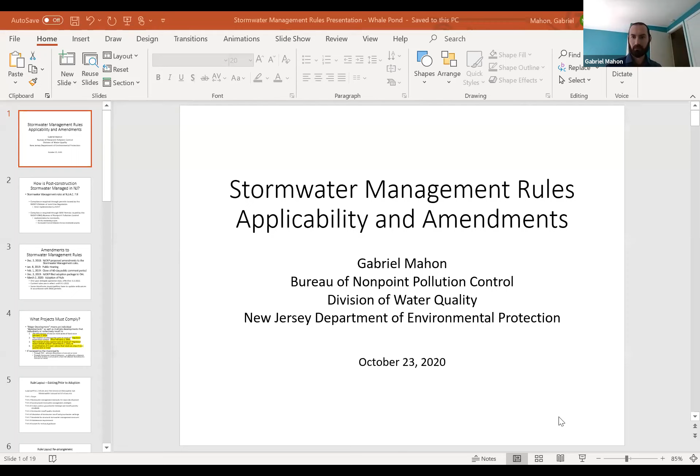So thanks for the introduction. As he said, my name is Gabriel Mahon. I'm the Bureau Chief of the Bureau of Non-Point Pollution Control in the Division of Water Quality. Today we're going to talk a bit about the stormwater management rules applicability and the amendments that we recently adopted. First thing I want to go over is just a little specifics about exactly what we're talking about.

So how is post-construction stormwater managed in New Jersey? And I say post-construction, I want to just emphasize that we're talking about post-construction — how the stormwater management is managed after construction is completed. There's a whole different set of regulations that govern how stormwater is managed during construction, and that's not what we're going to be talking about.

So post-construction management is really handled by the stormwater management rules, which are NJAC 7:8. There's two ways that an applicant's going to wind up getting reviewed under these rules. One is they come to the department because they need a permit from land use regulation. Now there is a bit of a reorganization happening at the department, so I think land use regulation's name might be changing slightly, but it's really still the same program. They do the flood hazard permits, the wetland permits, the highlands permits, CAFRA permits. And if you're also a major development, which is the trigger for being subject to the stormwater management rules, and you need one of those permits, then the department reviews to make sure you meet the stormwater management rules.

On the other hand, if you don't need a permit from the department — and the reality is the vast majority of developments in the state don't need a permit from the department — then in that case, you're getting reviewed at the local level.

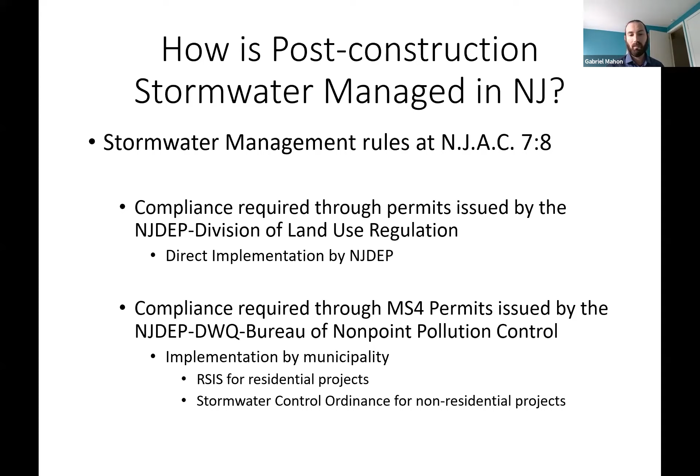Is to make requirements for residential projects uniform across the state. When it comes to non-residential projects, you really have to look at the local stormwater control ordinance. We do have a model ordinance that we put out, and many municipalities just adopt it, but others have chosen to modify it or even create their own ordinance that's as stringent as our rules. So keep that in mind—you've always got to look at the ordinance if it's a non-residential project.

Now let's talk about the amendments. This is the schedule of the amendments. We originally proposed them back on December 3rd of 2018. We had a public hearing about that on January 8th of 2019. The public comment period closed on February 1st of 2019. And then we filed for adoption on December 3rd of 2019.

If you're familiar with how the rule process works, you have one year from when you propose to adopt, to file for adoption. And you can see we did it exactly on the last day we had—we filed for adoption about an hour or two before the deadline.

Now the rules didn't actually get published in the register until March 2nd of 2020, and they come with a one year delayed operative date from that publication. So the rules won't actually become operative until March 2nd of 2021, next year. Until that time, our current rules, the same ones from before the proposal, are still in effect.

There's a few reasons why we're doing that. Obviously it's a complicated procedure to design your stormwater management for a site, so we don't just change them on a whim. We give people an opportunity to finalize things that were already mostly completed before they start having to design for the new standards. That's part of what the delayed operative date allows.

But also at the same time, we do need to give time for municipalities to update their ordinances. Our MS4 permit already sets forth a provision that basically says if we notify a municipality that their ordinance isn't up to standard, they have one year to fix it. So we just use that same time frame, one year.

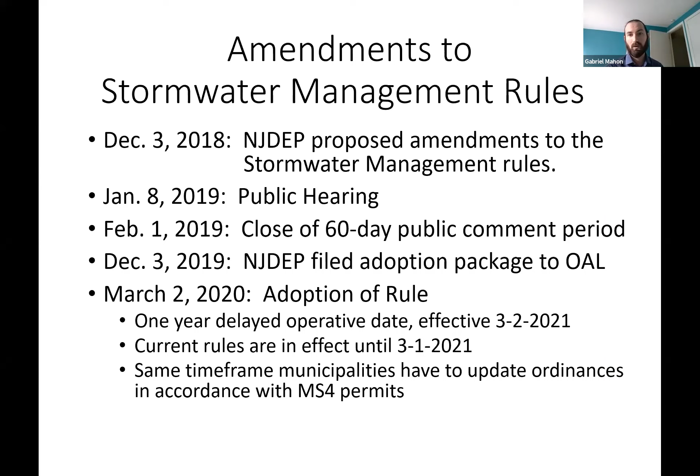And the day that we published the adoption, March 2nd of 2020, we sent notices to every municipality in the state, letting them know that their ordinance was no longer sufficient and they had one year to revise it.

Okay, importantly, what projects have to comply with these rules? Like I mentioned briefly before, the term is called major development. What we're looking at here is the definition under the newly adopted rules, which will become effective on March 2nd of 2021. But it's not tremendously different from our existing definition. I've highlighted some of the major differences and I'll go over why we did that.

First, if you read the intro language, it says it means an individual development as well as multiple developments that individually or collectively result in any of the things below. So keep that in mind—you can't break projects up into smaller projects at the same site to avoid regulation. It's going to count all the projects together.

Or you can't break phased projects up or anything like that—it counts them all together. We've always done that, but we changed that language slightly to make it more clear, because we originally used the term 'ultimately disturbing more than one acre.'

And sometimes that could have been confusing, so this clarifies that. The next thing is the disturbance of 1 or more acres of land in the definition.

Now that's the same as it is under today's rules, except we've added the February 2nd, 2004 timeframe. That's really a clarification on our part with the use of the term ultimately disturbing 1 or more acres of land. That question sometimes came up: what if I did disturbance in 1990? Does that count towards the 1 acre? So we've made it clear that it's tied to February 2nd, 2004.

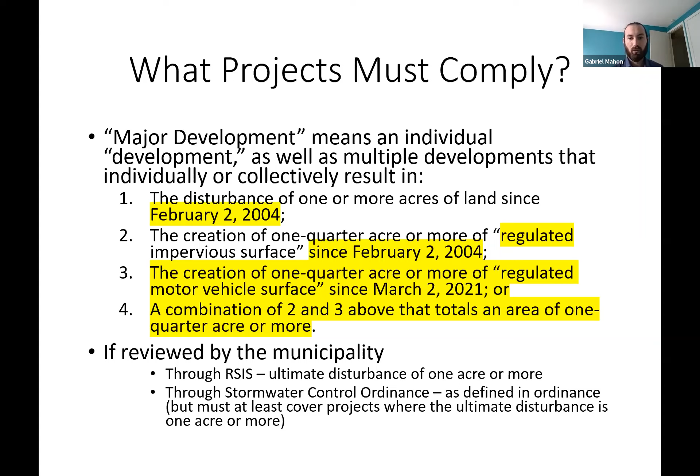That's the federal minimum standard under the MS4 program, and that's all we mandated the municipalities to do at this time. But many municipalities have chosen to either have smaller thresholds—say that 1/2 acre of disturbance, or I've seen it as low as 5,000 square feet—or they've chosen to just adopt our exact definition, which would include the 1/4 acre. So you really do need to look at the local stormwater control ordinance to know exactly what their definition is.

Just want to go over the major changes in the rules. This is the existing layout of subchapter 5, which is the main part of the rules that contains all the requirements for what you do for your stormwater management on an individual site. So we've got the scope, the stormwater management measures for major development—which really apply to all projects—and the non-structural stormwater management strategies.

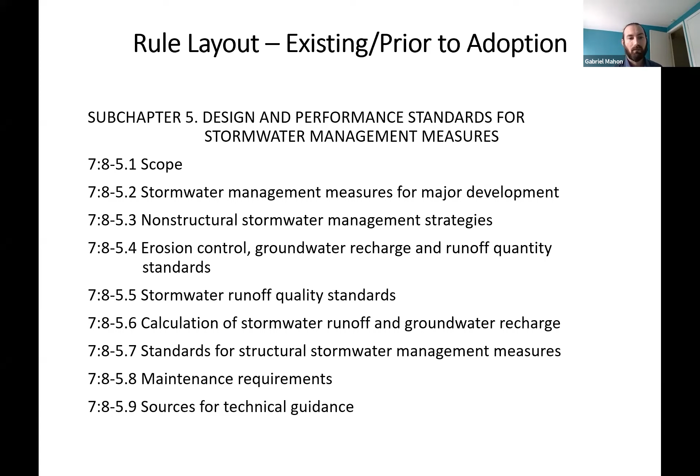You've got erosion control, groundwater recharge, and runoff quantity all packed together at 5.4. Then quality is 5.5. 5.6 is how you do your calculations. 5.7 is standards for structural stormwater management measures. 5.8 is maintenance. 5.9 is your sources for technical guidance.

These are the changes we're making. One major change is introducing green infrastructure as a requirement. We're removing the non-structural stormwater management strategies as something evaluated on a site-by-site basis, moving those into municipal planning requirements instead, requiring the municipality to incorporate that into their overall planning rather than looking at it on an individual site basis. That clears out that section, and that's where we put the green infrastructure requirements.

Other things we did: we looked at 5.7, the standards for structural stormwater management measures, and said these are really generic things that apply to all projects. We could put that into 5.2 and clear that space in 5.7 for ourselves. So we did that, moved all the requirements in 5.7 up into 5.2, and then moved the calculations from 5.6 down to 5.7. That cleared out 5.6, and we moved runoff quantity down there into 5.6.

We also moved erosion control up into 5.2, the stormwater management measures for major development, because that's also a requirement that really applied to all projects. We don't really have any erosion control standards per se in our rule — it just says meet the soil erosion and sediment control standards. So we didn't feel it was necessary to house it there with the other major requirements in our rules.

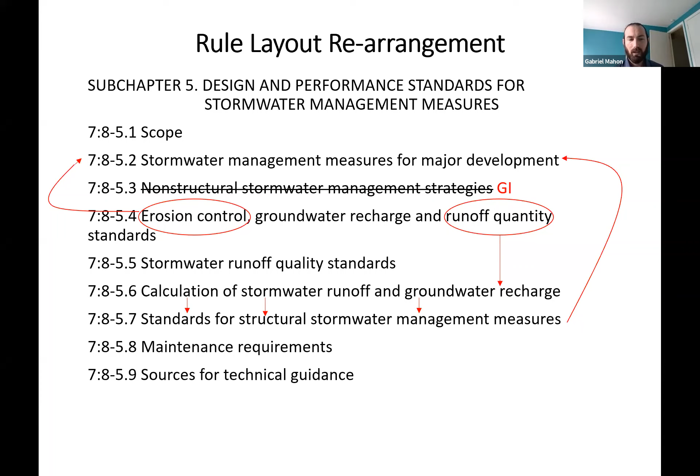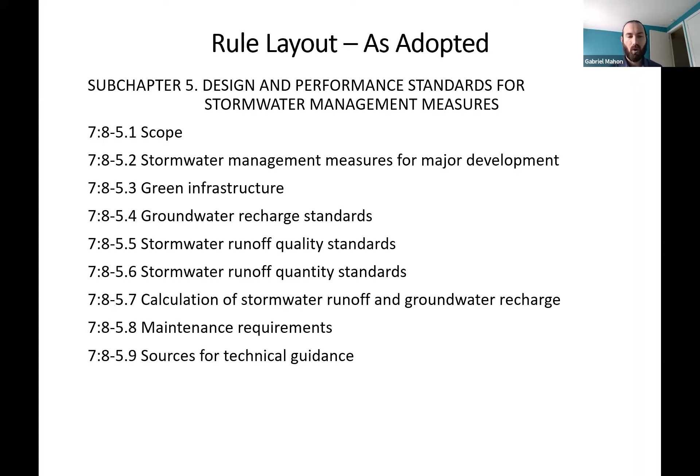So after we do all that, we have scope as 5.1, stormwater management measures for major development as 5.2 — keep in mind there's a lot more information there now than before. We've got 5.3 as green infrastructure, 5.4 groundwater recharge, 5.5 stormwater runoff quality, 5.6 quantity, 5.7 the calculations, and 5.8 and 5.9 remain unchanged. What this has done for us is made the rule a lot more streamlined and clear. The major requirements each have their own section rather than multiple things combined together, which sometimes led to confusion. Hopefully this clarity leads to better designs that are more compliant.

Let's get into the actual green infrastructure standards. First, the definition of green infrastructure under our rule — straight cut and paste from the rule: it's a stormwater management measure that manages stormwater close to its source by treating stormwater runoff through infiltration into the subsoil, treating it through filtration by vegetation or soil, or storing stormwater runoff for reuse.

Before we get the question, I'll answer it now: why doesn't this say anything about evapotranspiration? Well, we're talking about generally designing stormwater management measures to manage the 100-year storm. The amount of evapotranspiration that happens during the maybe at most 72 hours that water is supposed to be in a stormwater management basin during a 100-year storm is really not significant enough for us to include in the calculations. So it's not part of our calculations anywhere, which is why it's not specifically mentioned here. But if you think of any basins that do evapotranspiration, they all fit into either number 1 or number 2.

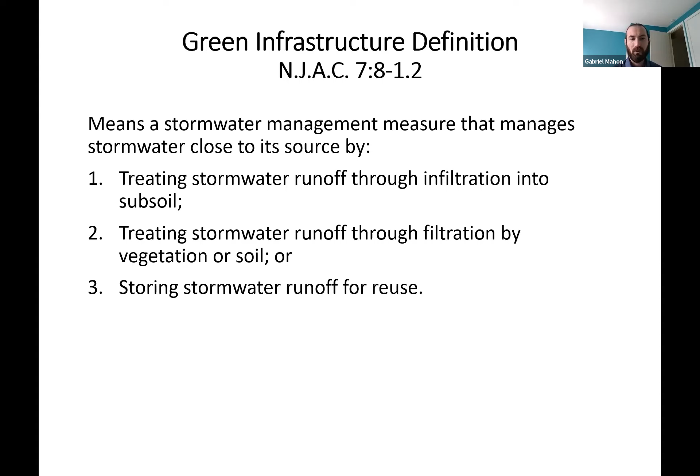Either they're going to be providing infiltration — if it's a bioretention basin that infiltrates, it'll fit number 1, and that would also likely fit number 2. I think most of the evapotranspiration-type BMPs will fall into number 2 because there's going to be vegetation and soil. So even though it's not specifically mentioned here, it's covered by our definition.

This is the slide on the green infrastructure standard itself. The standard is relatively straightforward — you just have to use green infrastructure BMPs to meet our other requirements. You have to use green infrastructure to meet recharge, quantity, and quality. The only caveat is that you need to use small scale green infrastructure to meet recharge and quality. You can use large scale green infrastructure to meet the quantity standard, but keep in mind it still needs to be green infrastructure.

We created three tables in the rules to outline all the different BMPs we have and what standards they can comply with. When we go through those, we'll talk about what makes each one small scale versus large scale.

The other thing we've maintained, which was already in the existing rules, is the ability for someone to propose an alternative BMP. These tables list what's in our stormwater BMP manual. Of course, someone could always propose a BMP that we don't have, and there's a method for us to evaluate that. Just keep in mind that what's in the BMP manual is already department approved. If you use them, you don't have to justify that they'll work—as long as you follow our design, they're accepted. If you propose an alternative BMP, it becomes your obligation to prove to the review agency that it's going to work. That puts much more of the burden on the designer.

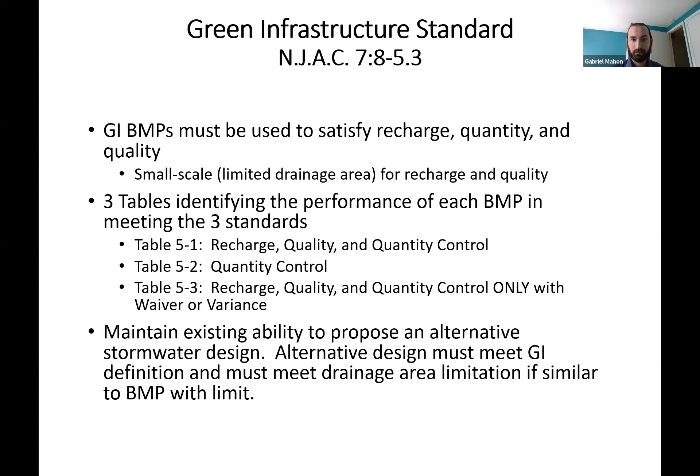This is Table 5.1, the small scale green infrastructure BMPs. You can use them for recharge, quality, or quantity. We'll go through the list. Cisterns don't have a drainage area limitation to make them small scale. Dry wells have a drainage area limitation of 1 acre. Grass swales don't specifically have a drainage area limitation, but based on their design criteria, they have a relatively limiting area already—you need to maintain a flow of maximum 2 inches, and there's a certain maximum velocity allowed.

So really, you can't have a grass swale capturing a huge area and still meet the requirements. A green roof doesn't have a drainage area limit because generally you're not putting drainage onto it. Manufactured treatment devices have a drainage area limit of 2.5 acres. You might be wondering why manufactured treatment devices appear on a slide about green infrastructure—there are many kinds, and we have a few that are basically small scale bioretention systems, which meet the definition of green infrastructure. That's the type we're talking about here. Next is pervious paving systems.

Pervious paving systems have a drainage area limit, but this one's a little different—you can have 3 times your pervious paving system's area flow onto it, so it's a 3-to-1 ratio. Let's say you construct 1 acre of pervious paving; you could have 3 acres of regular impervious pavement flow onto that, and it still meets the drainage area limit.

Then we've got small scale bioretention systems, small scale infiltration basins, and small scale sand filters—all three have a 2.5 acre drainage area limitation. And we've got vegetative filter strips. Those don't specifically have a drainage area limitation, but like grass swales, their design criteria is already very limiting. You have to have sheet flow flowing in, and sheet flow can only extend for 100 feet. So the maximum length flowing into this vegetative filter strip is already only 100 feet—you really can't have a huge area draining there.

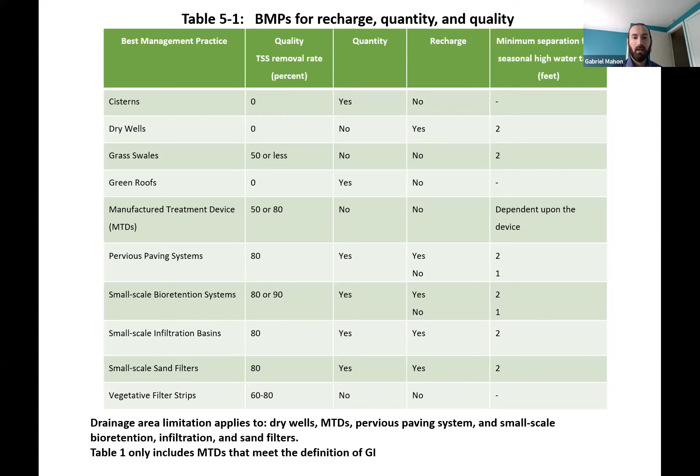Now this is Table 5.2. Keep in mind this is still green infrastructure, but no longer the small scale type, so you can only use these for quantity control. That's bioretention systems, infiltration basins, and sand filters—the same as the last chart, except in this case they just don't meet that 2.5 acre drainage area limit, so they're no longer small scale. You can't use them for quality or recharge at that point, but you can still use them for quantity.

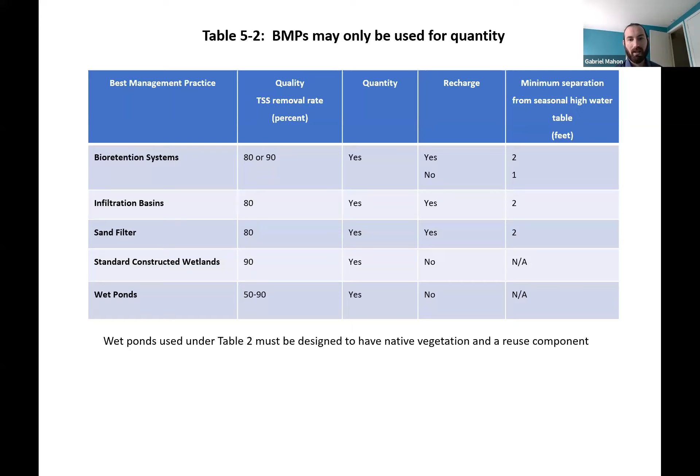This chart also adds standard constructed wetlands and wet ponds. Those don't appear in the earlier chart because they have such significant hydrology requirements that they need large drainage areas to maintain their permanent pools. For a standard constructed wetland, there are several varieties, but the one with the lowest drainage area limit is still 10 acres, and for a wet pond our limit is 20 acres—so they really don't fit our model of small scale. One other thing to keep in mind is that a wet pond, to be green infrastructure, has to have something to help meet that definition we showed earlier—it's got to have vegetation, reuse, something to make it green infrastructure.

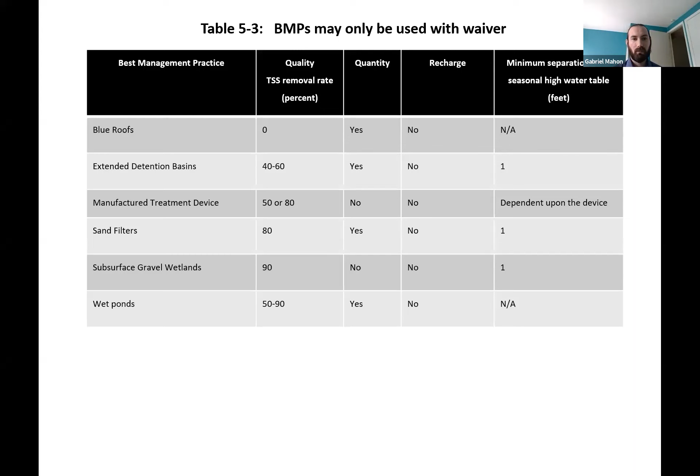Okay, that pretty much summarizes the green infrastructure standard. I'm going to go into the next big change we made, which is a change to the water quality section. What we've done here is revised the applicability of the water quality section.

Instead of being triggered whenever you create a quarter acre of impervious surface, we've changed it to creating a quarter acre of motor vehicle surface. We've done that for a couple of reasons. One, that lines up with our implementation - we never made people treat water quality for rooftop areas or sidewalks, areas that weren't vehicularly traveled. So lining our rules up with our implementation is important, in my opinion, for transparency.

But the other reason is we do want to make people treat other vehicular surfaces that aren't necessarily impervious. We would see people propose a gravel parking lot or a dirt roadway, and say 'well, it's not impervious, I don't have to do water quality.' We wanted to put a stop to that, particularly since studies show total suspended solids coming off dirt and gravel roadways is actually much higher than paved roadways. So we definitely want to get treatment for those types of roadways.

It's also important to note this is included in the definition of major development - we went over that before, as number 3 added to the definition - because we've changed the applicability here to motor vehicle surface. We didn't want a situation where someone creates a quarter acre of motor vehicle surface that would trigger water quality rules, but if we didn't change major development, it wouldn't have been subject to the rules in the first place. So we needed to change both, to make sure creating a quarter acre of motor vehicle surface is both major development and triggers the water quality standards.

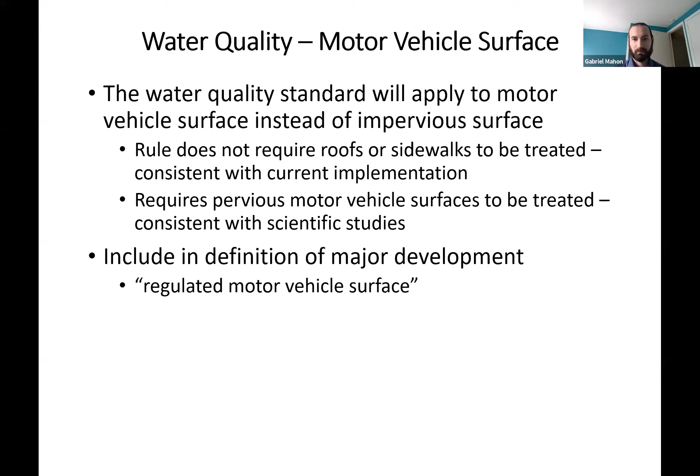Next thing I want to cover is some definitions we created to clarify the applicability of the rules. I briefly touched on the fact that we created definitions of regulated motor vehicle surface and regulated impervious surface. What these do is incorporate some concepts from our frequently asked questions, but I think they're very logical if you think about it.

Regulated motor vehicle surface focuses on things that are water quality specific. So these are situations where you have an existing roadway, and say the water flows off the roadway into the forest surrounding it and never makes it down to the stream, and someone proposes to put curbs and a collection system in this roadway. Now they're going to discharge that right into the stream - it's new impervious surface to the stream because those pollutants were never getting there before, or at least not to the same degree. That's something we felt needed to be regulated, and we long did regulate that through our frequently asked questions, but now it's very clear and added to the rule using that definition of regulated motor vehicle surface.

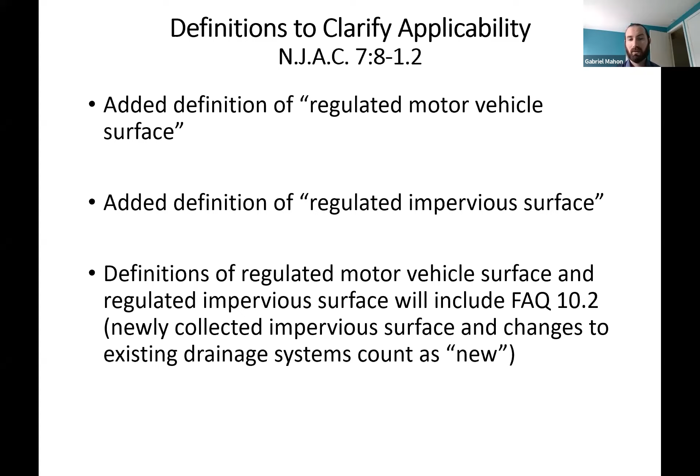Regulated impervious surface has similar concepts, except they're focused on flooding rather than water quality. This would be things like expanding the capacity of an existing collection system - you didn't create new impervious surface, but if the collection system was undersized and now you're making it 3 times larger, flow could get down to the stream faster because of that, and that could have adverse flooding impacts that need to be analyzed before it should be approved.

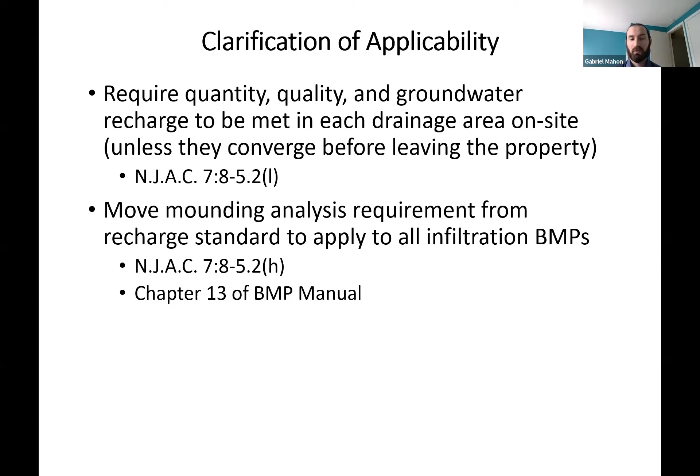A couple other things we did to clarify applicability: we added a requirement that all the standards need to be met in each drainage area on site, unless those drainage areas converge on site. We had this previously, but it was only contained in the water quality section. We've expanded it so it applies to water quality, quantity, and recharge. We've also moved our groundwater mounding analysis requirement from the recharge section into the section that applies to everything. Most of those BMPs are doing recharge, but sometimes those infiltration BMPs are for water quality and not recharge, so we wanted to make it clear it's for everything, not just if they're for recharge.

The last thing I want to touch on is the changes we made to the variance section of our rules. I don't know if any of you are familiar with what it says now, but there's not a lot of information. It does allow a municipality to grant a variance if someone is willing to do mitigation in the same drainage area. But there were no restrictions on when you could grant it. A municipality could grant it if they felt like it, as long as they had a mitigation plan in their municipal stormwater management plan. That requirement still exists, but we've clarified now that you can only grant a variance if it's technically impracticable on site.

And it has to be for engineering, environmental, or safety reasons. The applicant still needs to come as close to meeting the requirements on site as they can. So they can't just say, well, let me get a variance, I'll do it off site. They have to come as close to meeting on site as they can.

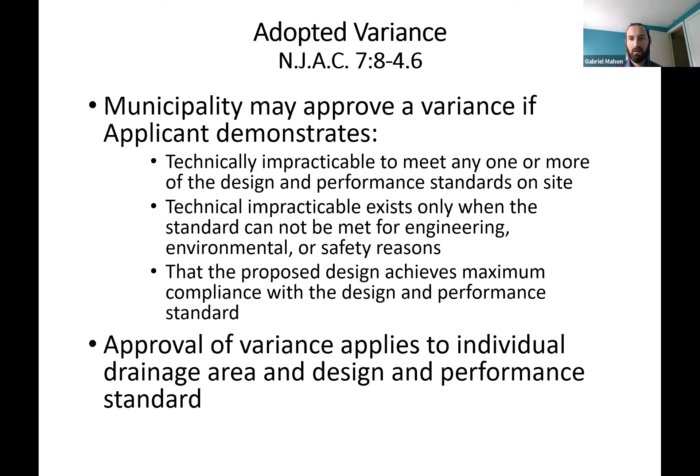We've also clarified that it only applies to the individual drainage area and performance standards. So they couldn't come in and say, well, I can't meet water quality here, but let me just do all my water quality as mitigation. No, they still need to do what they can on site, and then after that, they can make up what they couldn't meet on site as mitigation.

We've also clarified that it can either be a project that's in the municipal mitigation plan, or the municipal mitigation plan can set up criteria for the municipality to evaluate a project selected or proposed by the applicant. It has to be approved no later than preliminary or final site plan approval, right? Obviously, you can't just defer your mitigation to some nebulous time in the future. It has to be located in the same HUC 14 — previously it just said drainage area, which is kind of a vague term, so we clarified that by saying HUC 14.

It also has to be constructed prior to or concurrent with the major development, right? Because if you could potentially have adverse impacts by not doing your stormwater management, the same idea is true: if you don't construct your mitigation first, and you construct the major development first, there could be adverse impacts to the property owners surrounding that if you don't do your mitigation. It has to comply with the green infrastructure standards.

We've also clarified that the applicant or the party responsible for maintenance of the major development has to be responsible for the mitigation as well. So you can't pass the maintenance of the mitigation off to some third party. It has to be the same group that's involved with the application, either the applicant themselves, or, let's say, it's a residential development where you're establishing a homeowners association that's going to do the maintenance of the BMPs on site, then they can be responsible for the maintenance of the mitigation as well.

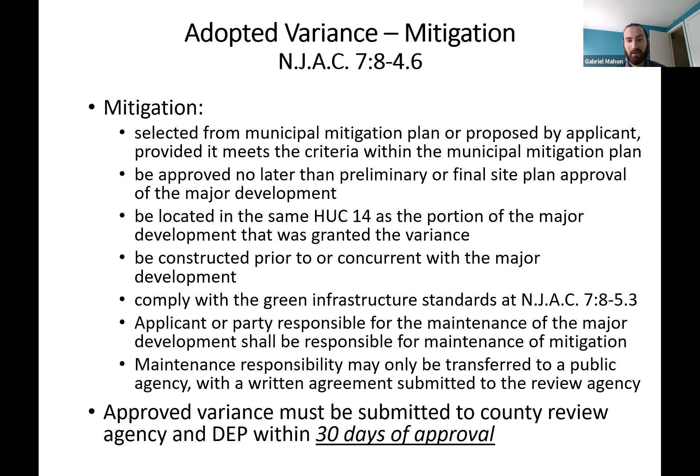Maintenance responsibility can only be transferred to a public agency if there's a written agreement that the agency has agreed to it, and submitted to the review agency. On top of that, we've also clarified that it has to be submitted to the DEP and to the county within 30 days of granting a variance. Previously it did say you have to submit it to the county and the DEP, but there was no time frame, so we've clarified it has to be within 30 days of approving it.

This is going to require someone to do mitigation. So let's say they don't meet green infrastructure on site, they're going to be doing it as a mitigation project. They have to provide equivalent or greater treatment than they would on the major development.

I think it's logical, though when you try to write it out it can be confusing. Basically if they had an acre development and were supposed to do green infrastructure for that and didn't, they're going to have to go off site with an equivalent or greater area. So it'll have to be at least an acre or more, and also has to have at least as much impervious surface. So if that acre development was 3/4 of an acre of impervious surface, their mitigation will have to manage at least an acre of total land, and at least 3/4 of an acre of that will have to be impervious surface.

On top of that, you can't just use a vegetative filter strip or a grass swale alone as your mitigation. The reason is they would have never been enough on their own to meet the requirements on the site originally, so they can't be enough for your mitigation. Now they could be combined with something else to do your mitigation, that's fine, but they just can't be the sole measure.

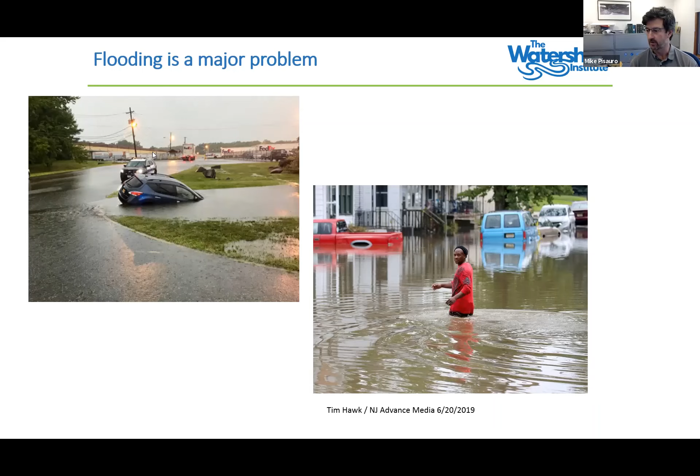The Watershed Institute is located in central New Jersey. We have been around for 70 plus years, and we've been working to keep our water healthy, clean, and safe. As Gabe has talked about the green infrastructure rule, this has been a huge move forward on the way we address stormwater management, but it has not been enough, and DEP has been working on additional stakeholdering and additional rules coming forward. But part of that, as we all know and have experienced, flooding is a problem. Flooding is continuing, and it's probably in some of our areas getting worse for multiple factors.

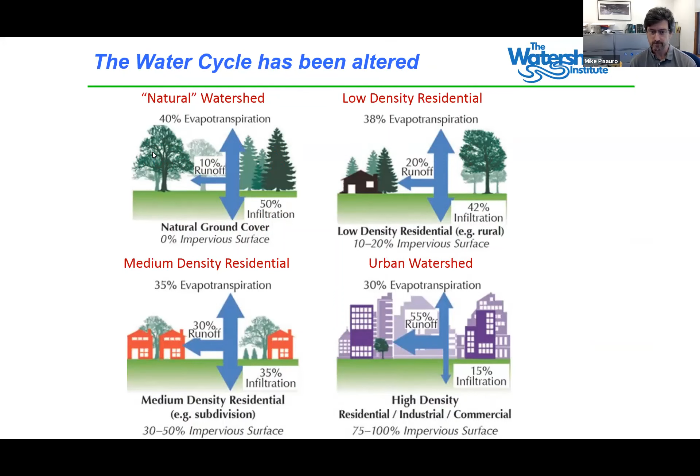Part of that is because of impervious surface, and we've sort of changed the water cycle. So as our communities get more and more dense with impervious cover, there's less space for that water to go and to infiltrate. Also, our weather patterns have changed.

So the first 7 decades of the 20th century, New Jersey has had about 44 inches of rain. In the 21st century, as of this slide from 2016, we had just over 47.5 inches of rain, which means almost 3.5 inches more rain hitting New Jersey, and quite a bit more water that New Jersey's stormwater management systems have to address, at the same time as we are increasing our impervious cover.

Recent land cover reports show that New Jersey has continued to convert our open spaces and farmland into urban space. That has slowed down, but overall in New Jersey we're about 33% impervious cover, and depending where you are in the state, your community might be much higher. So that water has to go somewhere.

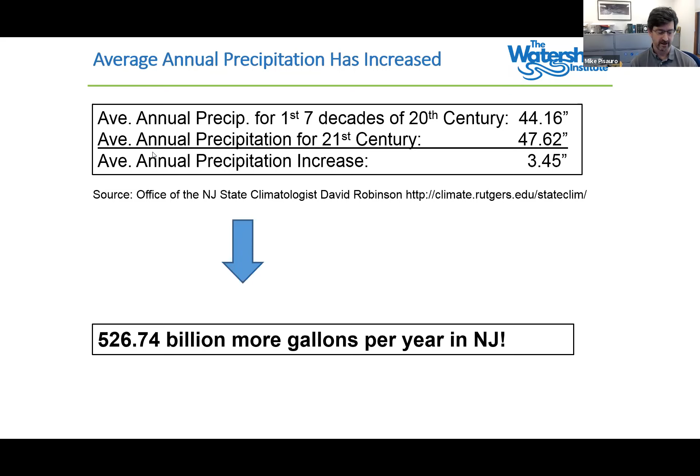Also, the rain patterns have changed. We're having more frequent heavy storms, and that rain is coming down in a shorter period of time. That has led to a bunch of things, and is one of the reasons why we, with other groups, have developed an enhanced model ordinance.

So we have more impervious cover, we have flooding, we also have water quality issues. This is from a DEP report: basically, the waters we monitor are not meeting designated uses, those uses set out by the Clean Water Act in New Jersey. They aren't meeting them, and for a large part it's because of the way we manage our land.

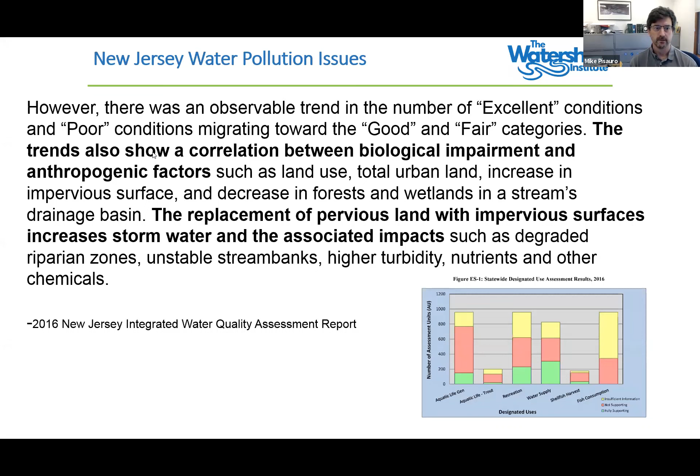Our current stormwater management regulations, while they have been improved through the Green Infrastructure Rule, are really addressed at slowing the rate of pollution, slowing the rate at which stormwater runs off our site. It's not stopping the pollution.

I hear this a lot at planning boards and zoning boards. When we talk about stormwater management, there's confusion when DEP talks about water quantity reductions. Those are, by and large—I think 99.9% of all projects I've ever seen—really talking about a reduction in the rate. You're actually having an increased volume of stormwater running off your site as you develop it.

As Gabe talked about, with the 1 acre of soil disturbance or 1/4 acre of regulated surface, those are the projects that get stormwater management. Smaller projects do not. In a lot of our older communities, you are seeing infill development, not necessarily large projects. So how do they contribute to stormwater management and the stormwater issues?

And the sins of the past—before we had stormwater management rules, we had impervious cover, and as we get more densely populated and more densely developed, those sins of the past, which may or may not have been sins back then, have come back to haunt us, and we're not really addressing that at all.

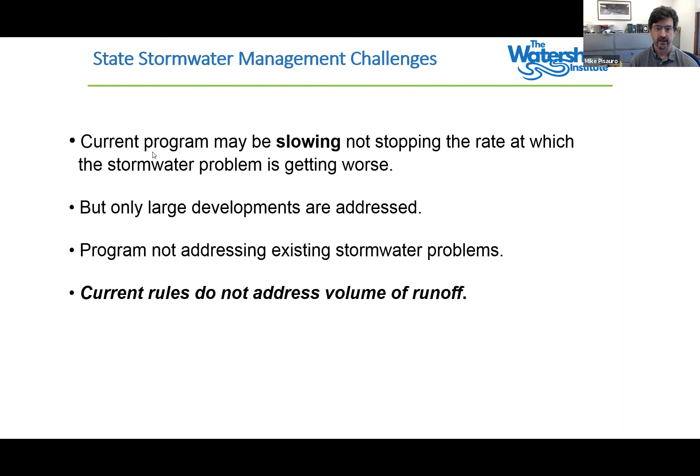So we came up with enhancements, as I mentioned. DEP's model ordinance, which Gabe mentioned quickly, has a little bit of language in there indicating that municipalities can choose stronger or additional measures in order to address local water quality and flooding conditions, as well as other environmental and community needs. So that is very important, and forms the basis of why and how this should be done.

As Gabe mentioned, there is the RSIS. I take a slightly different opinion of it—I don't believe that it necessarily preempts residential development requirements. I know that goes against the common wisdom, but RSIS was meant to reduce and even the bar for design standards. Stormwater management is a Clean Water Act issue, not necessarily a design or construction issue. RSIS talked about where there are non-commensurate gains in the protection of public health and safety, while stormwater management, flood reduction, and meeting water quality standards is a public health and safety issue.

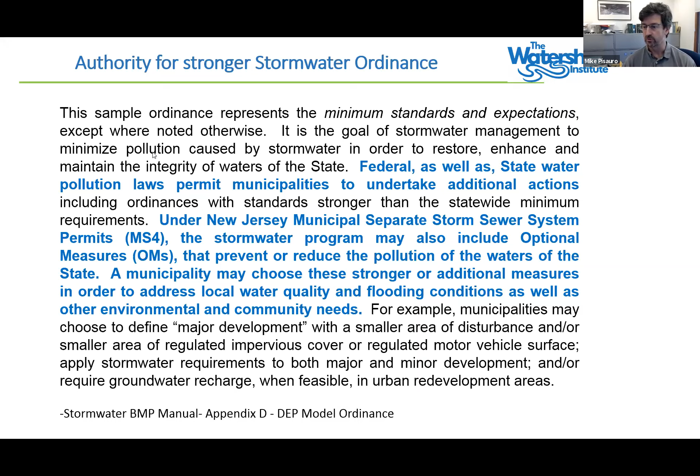Also, there is a provision in RSIS talking about requirements that do not necessarily meet the major development threshold. So I understand I'm going against common wisdom, but I would posit that municipalities can go stronger on both non-residential and residential development.

So we've come up with this enhanced model ordinance, which has certain components: redefine major development, address smaller developments, address redevelopment, capture and treat stormwater on-site with an on-site retention standard, enhance the analysis of environmental impacts from development, have permitting and reporting requirements for maintenance, and put the stormwater management requirements not only in your design standards and land use code, but also in your zoning code, as a belts-and-suspenders method to address RSIS.

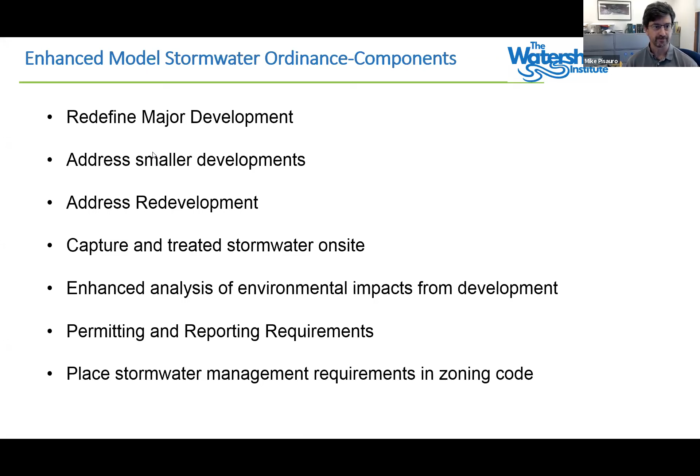So major development—right now it's that 1 acre of soil disturbance.

We have recommended that be reduced to a 1/2 acre of soil disturbance, and the 1/4 acre of impervious cover or regulated surface, we have recommended down to 5,000 square feet of impervious cover. The reason for those reductions is to capture more sites that may not necessarily meet the normal major development, but you're capturing more sites and getting better stormwater management.

These recommendations actually came from a couple spots. One of them is from a report EPA Region 2 did on the DEP stormwater management program back in 2014, as well as the federal program for federal buildings.

We also believe that all surfaces should be treated for water quality, not just motor vehicle surfaces. Even though it is a roof or sidewalk and you don't drive motor vehicles there, they do have in many circumstances a host of pollutants that come with that runoff, whether it's leaf litter, bird droppings, or air deposition of nutrients and metals. And for sidewalks, whether it's sand or ice melt or whatever you've put on that surface, intentionally or unintentionally, that runs off. While it is cleaner, it is not clean.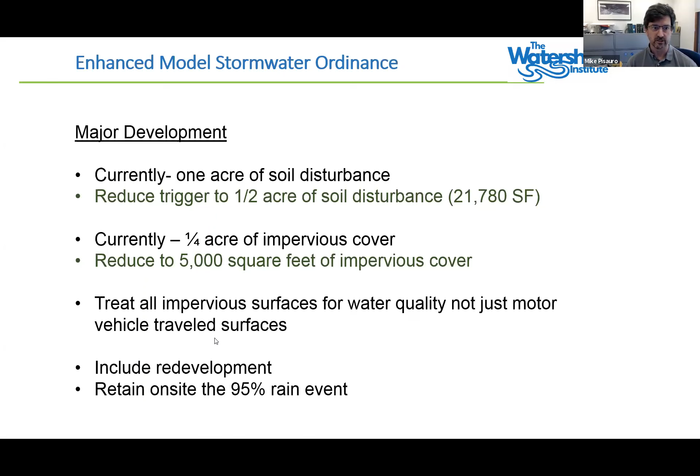So if you don't have major development, many of our properties still add impervious surfaces, whether that's patios, additions, a small building, commercial or residential—but they are contributing to the stormwater management problems we are having. They're contributing to the volume flowing off our sites, and they're contributing to the pollution loading.

So minor development is triggered at 250 square feet. If you hit that trigger, you treat 2 gallons per square foot of stormwater, running it through a green infrastructure system, and retain on site the 95th percentile storm to the extent you can.

Again, have a redevelopment standard, so if you remove impervious surface and replace it, you are treating that stormwater. Unlike major development, where you can get a variance but have to do a mitigation project, minor development mitigation is not required by the rules.

We're suggesting there may be circumstances where it might make sense to waive those requirements for the municipality to get a mitigation fee, to use that for projects within the township, hopefully within that drainage area, to provide some flexibility for these small projects that may not make sense or may not be able to meet minor development stormwater management.

A great example: a property owner wanted to put a rain garden in as part of some work they were doing on their property. The site ran downhill, and the best place to put it was in the floodplain of a stream that flooded all the time. That didn't make a whole lot of sense to do there, so this provided some flexibility.

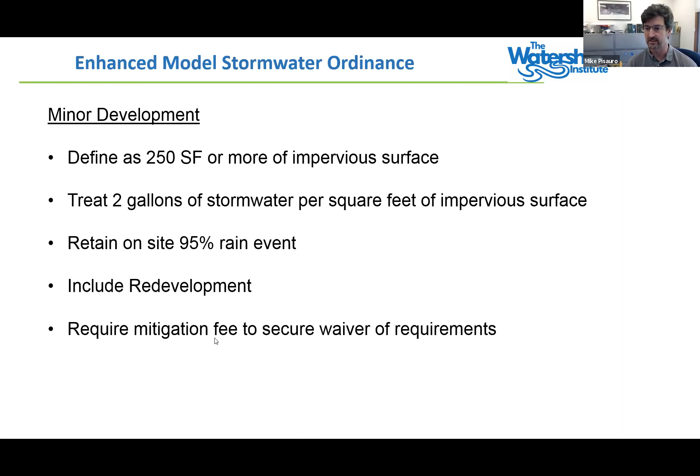Also, enhance the analysis that applicants are supposed to do when they submit their stormwater management plan. Really dial in the on-site mapping and analysis of environmental features, including forests. Are there core forests that you're now going to impact because you've reduced that forest? Include all of the waterways, not just category 1 and upstream tributaries.

Take a look at what the long and short-term impacts of that development is. If you're changing the hydrology of that site, even though you stayed away from wetlands, you've changed the hydrology by moving water away from a site, from that wetland, what is that long-term impact on those wetlands or streams? What's the impact to adjacent property owners from a volume standpoint? Are you increasing the volume downstream? Hopefully the on-site retention standard deals with that, but even though you've met the quality, quantity, and recharge requirements, you have put more volume downstream, and what are those impacts?

Those non-structural or low-impact design standards that Gabe talked about, moving out of the design and putting them into the planning requirements from the municipality, we think those are important to keep within the design. Green infrastructure, and especially the small drainage area requirements, may do a lot of that, but those are very important. Using nature, using existing site conditions to manage your stormwater before you start designing systems seems to be better in line with green infrastructure than not.

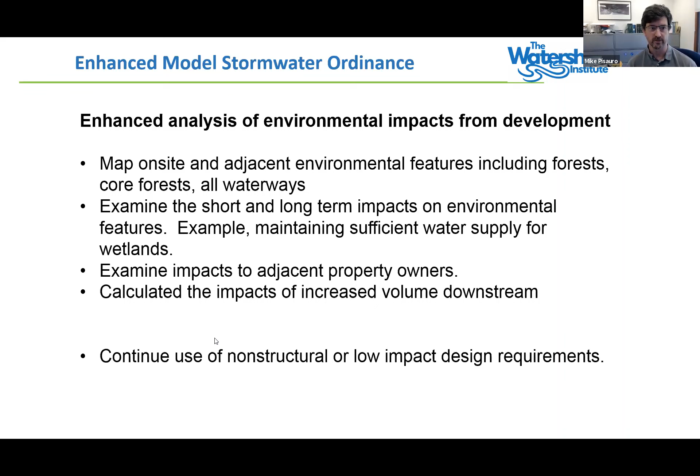And then require inspection. So again, one of the things we've all seen is you put these systems in, are they being maintained? If they're not being maintained, are they going to function appropriately? So part of the MS4 permit that all municipalities have is a requirement for all these systems to be maintained and for the municipality to report on that at the end of the compliance period.

So this is a tool to allow municipalities to actually have the information so they do that certification, they're being accurate. Have all the property owners that have a BMP apply for a permit, they submit reports that these things are being inspected and being maintained, and those maintenance records are submitted. Auditing by the municipalities to make sure those reports are accurate.

Whether there's a fee or not, that's really up to the municipality, but it makes sense to have a small fee to cover the cost of the inspection program. And again, this we look at as a way to assist the municipality comply with their requirements.

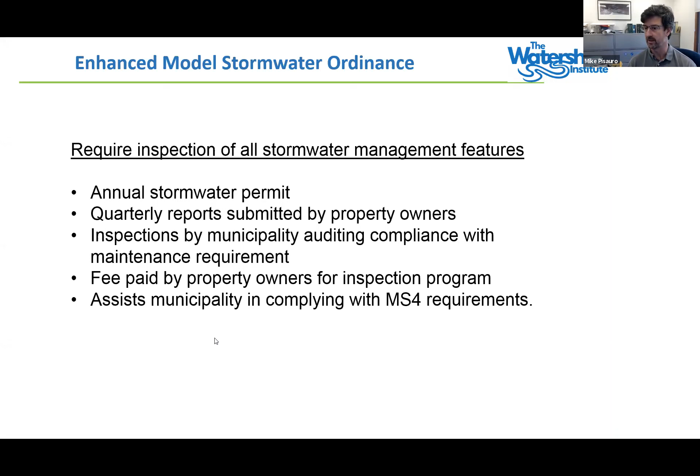So that was, again, a whole lot of information in a very short period of time. We have a handful of webinars on our website dealing with green infrastructure. We have a copy of our model ordinance on our website, and the RSIS issue. We're doing a webinar on December 2nd to really talk about why RSIS is not the impediment that common perception says it is. We also have some training on green infrastructure. And as Gabe said, we are here to answer questions, to provide information, to guide municipalities and others as they go through the stormwater management process.

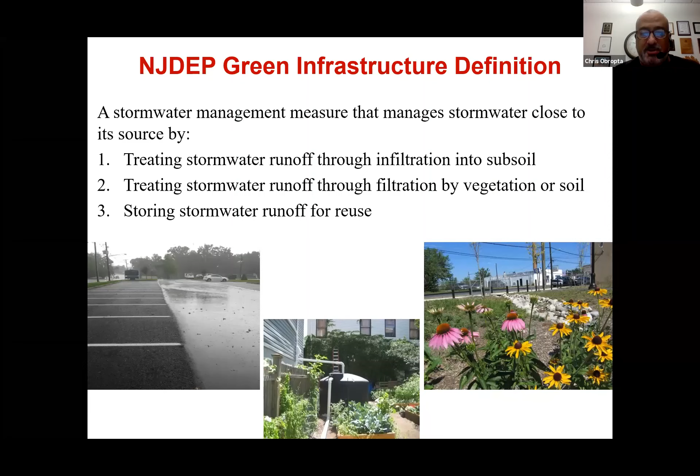So the idea with green infrastructure also is to manage stormwater at its source. So the days of having a 50-acre subdivision with 50 homes on it and a big detention basin at the bottom of the hill are probably over. You're going to see a lot more smaller systems scattered throughout the development, and most of the drainage areas will be less than 2.5 acres for these green infrastructure practices.

So you still have to remove 80% of the sediment. You still have to address the water quantity, so reducing the peak for the 2-year, the 10-year, and the 100-year storms. And then you have to maintain your annual groundwater recharge. So if the development was recharging 1 million gallons of stormwater a year, after you put up your houses or your factory or whatever it is, it has to be recharging 1 million gallons of stormwater a year. So those are the 3 main things, and that's been there since 2004.

It was great that they went from just doing quantity. You also look at recharge and sediment removal. So now we get quality and groundwater recharge. It was a great move by the state of New Jersey, really kind of ahead of a lot of the other states.

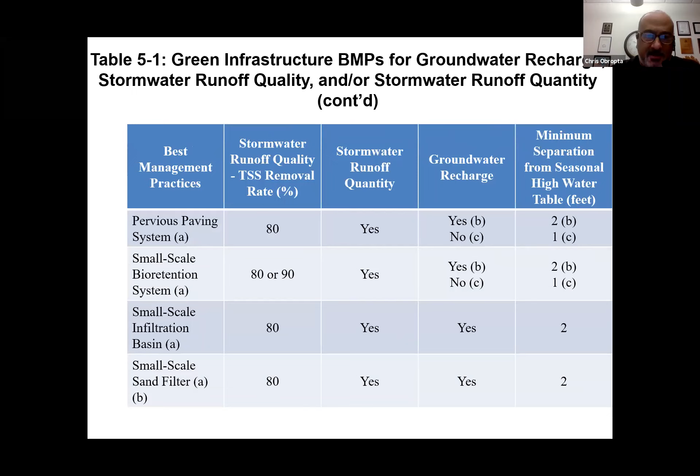But then we start looking at these other practices here, and we start seeing that, wow, these actually can satisfy this. So all 4 of these can satisfy all 3 of the requirements, so that you can get the stormwater quality requirement, the TSS removal rate, 80% or more. You can reduce the peak flow from the 2, the 10, 100-year storm using all these systems, and you can promote groundwater recharge for all these systems.

Now, some of these say yes and no. The no's mean that you cannot get groundwater recharge because there's clay or there's other surfaces that water can't get into. In most cases, if those restrictions are there pre-development, they're going to be there post-development.

Groundwater recharge requirement may not be that important, because if you're not recharging anything now before you develop, you shouldn't have to recharge anything after you develop. So that's kind of the point with that.

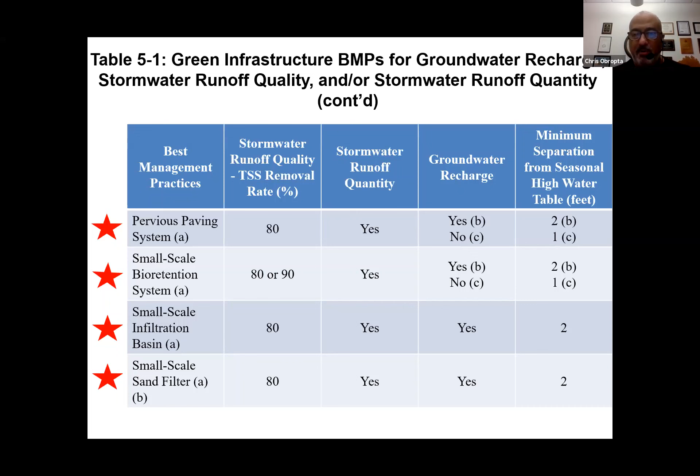Let's talk about each of these systems. You're going to see a lot more pervious paving systems, I think, in New Jersey, a lot more porous asphalt. We're seeing a lot of this already. Developers have realized they can use porous asphalt as a great stormwater practice. The idea is the water passes right through the asphalt, doesn't have the fine material in it, and goes into a stone layer underneath. That stone layer cleans the water, so you can get an 80% TSS removal, total suspended solids removal.

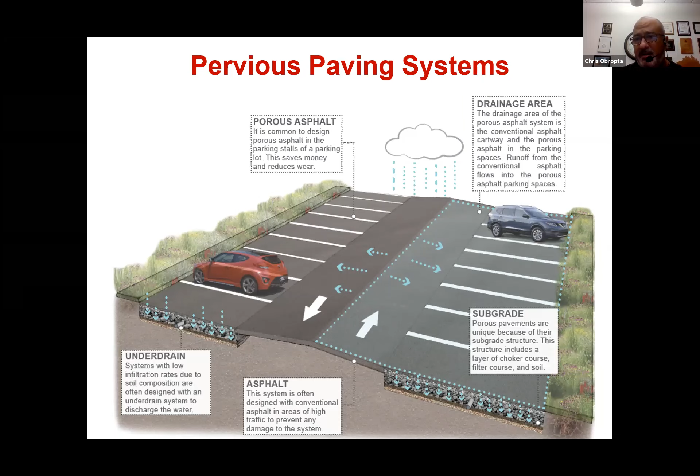It can also do groundwater recharge, and you can make that stone layer under the parking lot big enough to hold the water and reduce the peak flow from the 2-year, 10-year, and 100-year storms. These are design storms that we engineers use. A 2-year storm is about 3.3 inches of rain over 24 hours. The 10-year storm is about 5.2 inches over 24 hours. And the 100-year storm is anywhere between 7.8 and 8.8 inches over 24 hours, depending on what county you're in. So that's a lot of rain. These systems can be designed to handle and manage that and reduce the peak flow. They're very, very good systems.

There are different types of permeable pavements: porous asphalt and pervious concrete. Both are very similar to the original material. The porous asphalt is just regular asphalt without the fine material, and the pervious concrete is regular concrete without the fine material. Water can pass right through it.

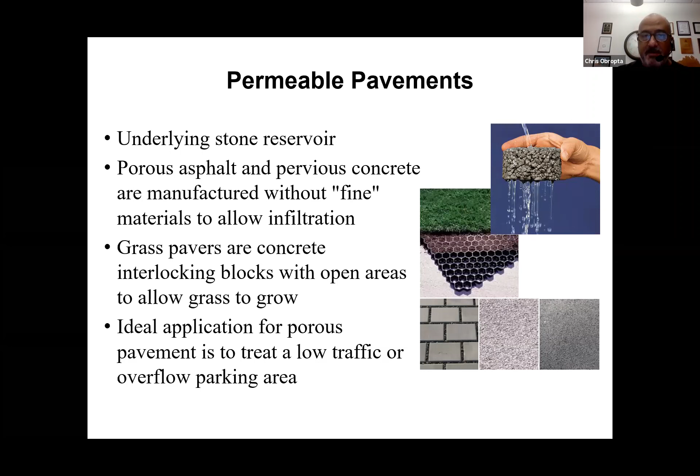There's also grass pavers, and the permeable paving system with paving stones. Here's how it works: in the cross section, you can see the stone underneath the parking lot has a void space of about 40%. So for every 2.5 gallons of stone, you can hold about 1 gallon of water. So for every foot of water you need to store, you need about 2.5 feet of stone. That tells you how deep you make it.

Most porous asphalt parking lots only have 6 to 12 inches of stone underneath, usually not much more than that. So that's important.

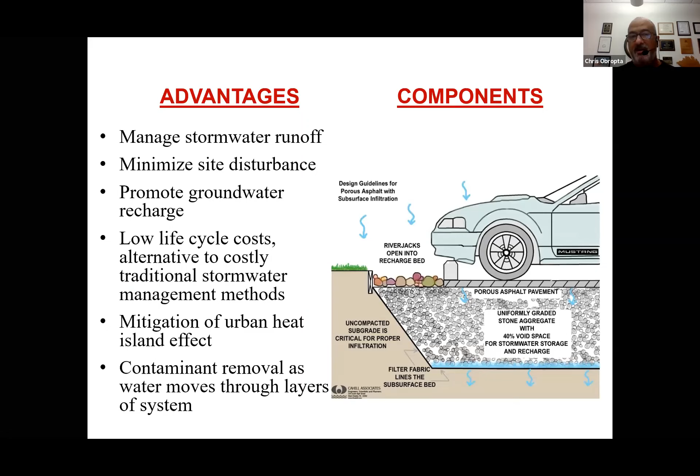Because it's porous, it breathes. Air can pass through the system, so it doesn't heat up as much. This reduces the heat island effect in cities, because black surfaces retain heat and hold it overnight, which takes more energy to cool down the city and can create a big heat island effect.

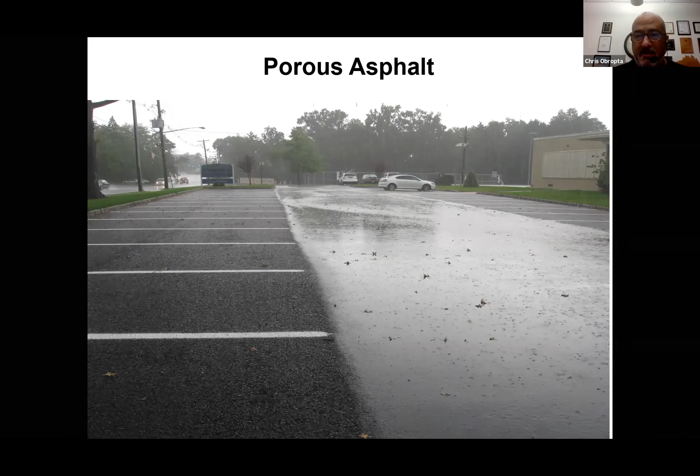With pervious concrete, one issue is that if you oversalt it, it can break it up, so we try to be very careful about that. You really need someone who's a specialist in pouring this - there are guys certified who can put it down. Now there's also a place in Pennsylvania that makes this precast, pre-manufactured: they pour it in a warehouse, cure it there, and deliver it on site as slabs. You get a 5-foot by 5-foot concrete slab delivered to the site, take it off the truck, drop it on your stone bed, and now you have your pervious concrete sidewalk. It's a pretty nice way of doing things.

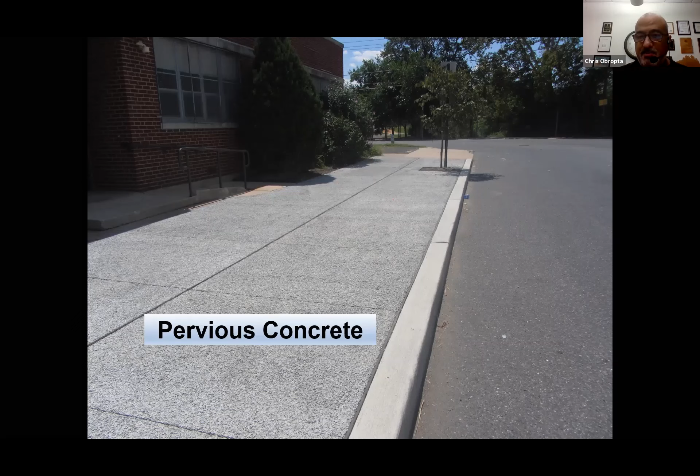Permeable pavers - well, this is for the ultra rich, I imagine. Very expensive.

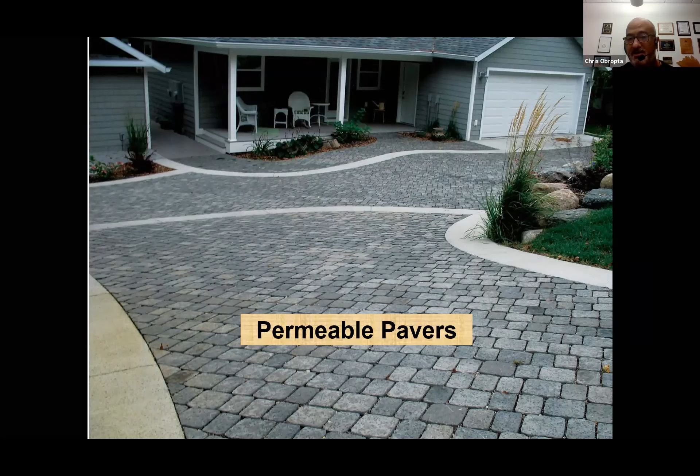Infiltration through this is a little bit harder because it only infiltrates the slots between the paving stones. Those cracks where water infiltrates can get clogged, particularly if you have landscape surfaces nearby that aren't stabilized, with soil washing onto them. So you'd have to do some work to clean these out on a regular basis.

And then we have grass pavers. These are great. This is behind a public works building in Parsippany. This was a fire access road. The water would fill up on this road, and it would seep into the building and flood out the head of the public works office.

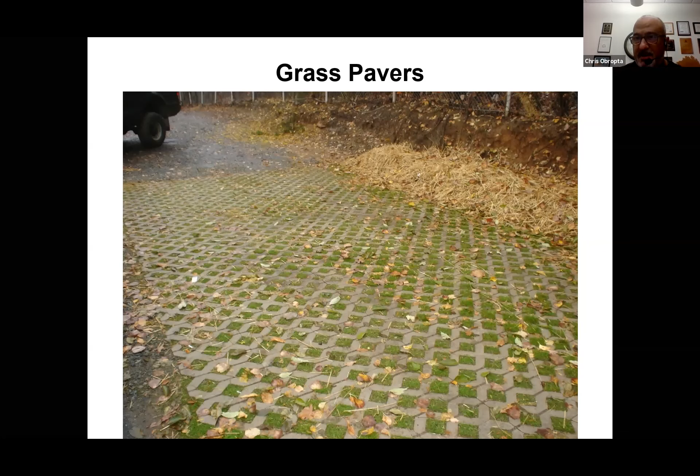So we replaced this road with turf stone. It's really just a concrete block, 1 foot by 2 foot, with diamonds in it. We fill the diamonds with soil, plant grass on it, and underneath is about 6 inches of stone. Water lands on this and goes right through the system into the stone. They had about 6 inches of rain after we put this down, and not a drop made it into the head of Public Works office. It worked out really well. It's a great system.

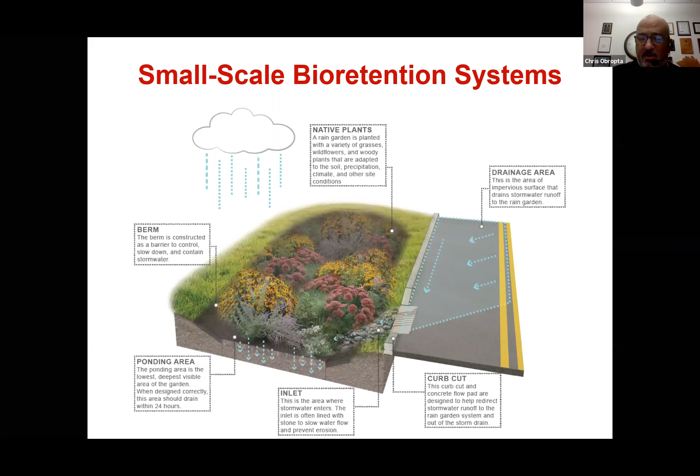Small scale bioretention. We keep using the term small scale because we have a small drainage area for this. Like Gabe was saying, 2.5 acres is the maximum drainage area for these systems. Bioretention systems is a neat word for rain gardens, so we tend to call it that since people understand it more easily. They're just shallow landscape depressions designed to capture stormwater and infiltrate it into the ground.

Usually it'll fill up with 6 to 12 inches of water. Within 48 hours, that's usually into the ground. It has to be drained within 72 hours or mosquitoes start to breed. So we engineer a soil mix that goes in the bottom so it drains pretty quickly. You can put these anywhere—that's what's great about them. They can be incorporated into any landscape.

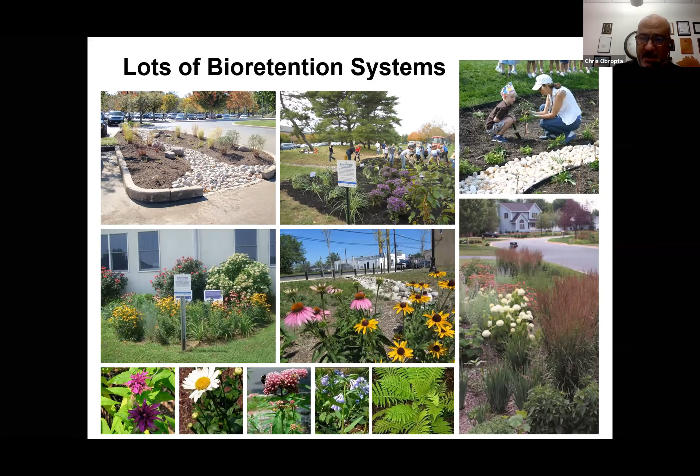You can see the picture on the left-hand side—one in a parking lot island. The picture on the lower right is one off the roadway, taking roadway runoff. The picture in the upper right is in the courtyard of a school where the kids were planting it. There's one at the library, and the center picture is an abandoned gas station in Camden that we actually built into a rain garden park. There are 4 rain gardens in there, and now it's the gateway to the southern ward of Camden.

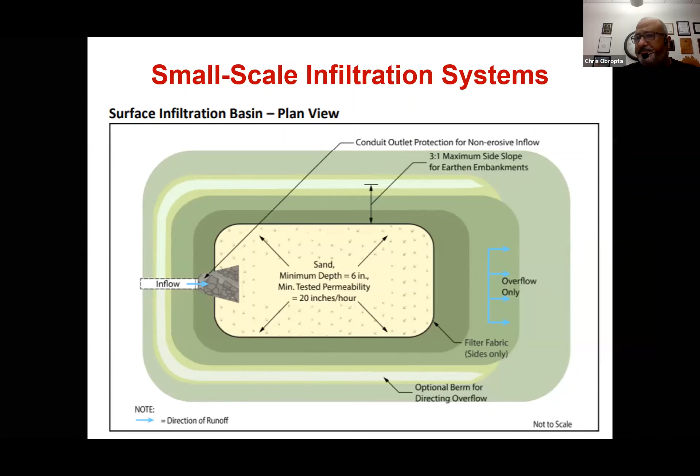There are 2 other systems that are going to be very popular as we move forward with these stormwater regulations. One is this infiltration system, using a sand bottom to get water into the ground. The problem with these sand systems is they tend to clog a little bit on the surface.

This is a technology that was adapted from the wastewater industry. In the wastewater industry, we have piping underneath this, and we can backwash it and pump water up through it to flush it out—very similar to the way you would backwash a pool filter for your pool. You can get stuff settling on top of this, a crud or film buildup.

You have to go in and manually rake it out and break it up so the sand will continue to work. The idea is the water is captured here and infiltrates into the ground.

The biggest problem with these systems is the seasonal high water table, since the water table underneath the ground changes throughout different seasons. This time of year it's increasing, it's getting wetter, so the water table's coming up a bit. The biggest issue is when people design these systems, they don't do a very good job estimating seasonal high water table, or they make a mistake, and they wind up digging these systems down into the water table.

So in the summer when they build it, it's great, it's bone dry. Then in the fall when it starts to rain, the water table comes up and the bottom stays wet and it doesn't infiltrate. That's one of the big problems with these types of systems. You really need 2 feet minimum separation between the bottom of the system and the seasonal high water table. That's an important factor here.

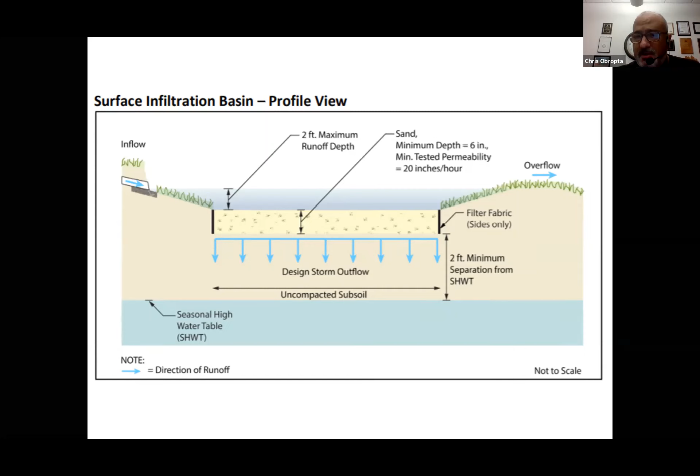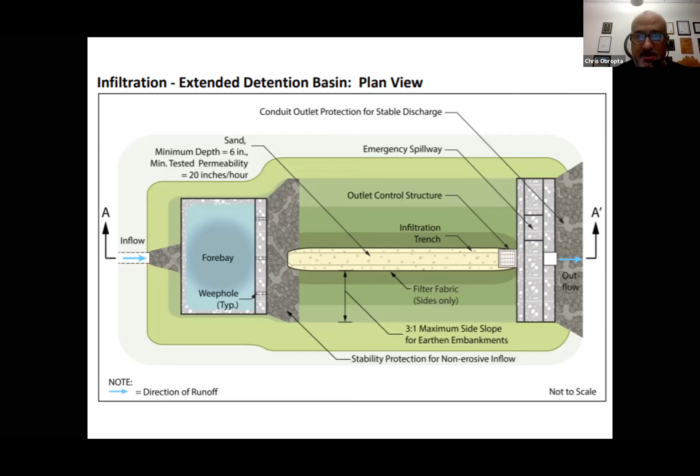These have also been incorporated into extended detention basins. So you have the detention basin that can manage the 10 to 100-year storm, but now you have this infiltration trench in the middle, which is basically a sand trench that allows water to go into the ground. It's another way to use this infiltration system.

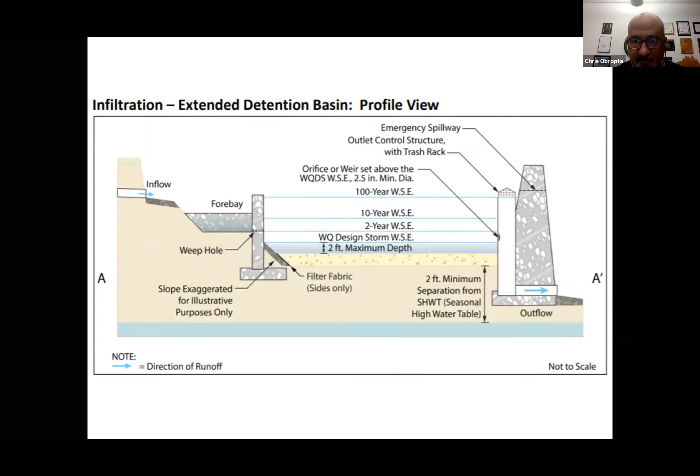Here's a cross section of it, so you can see this can handle all the different storms, the 10 to 100-year storm. And when you have the water quality storm, that just sits below the outlet and infiltrates into the underlying soil. The other one is a sand filter.

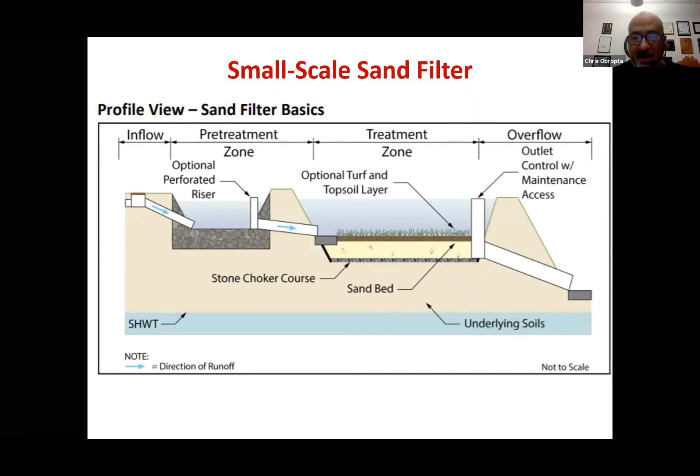Once again, you have seasonal high water table issues, you have to make sure you're 2 feet above that. But this is another system you're going to see - the infiltration system as a sand filter.

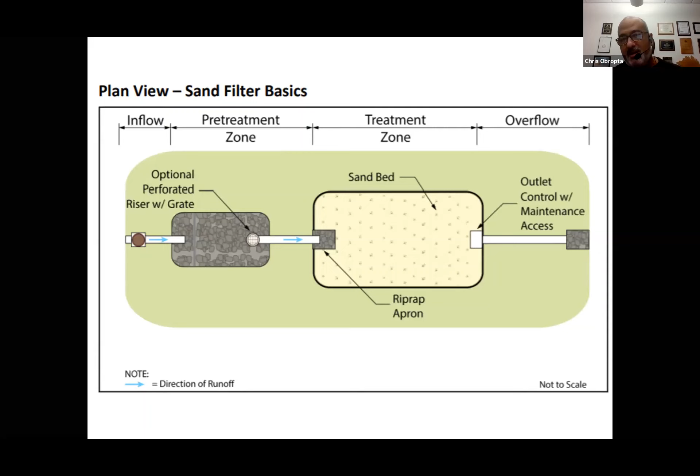And here it is with a pre-treatment zone in front of it. So you have a place where water comes rushing in with all the sediment settling out in that area, and then it overflows and goes into the sand bed where it infiltrates into the ground.

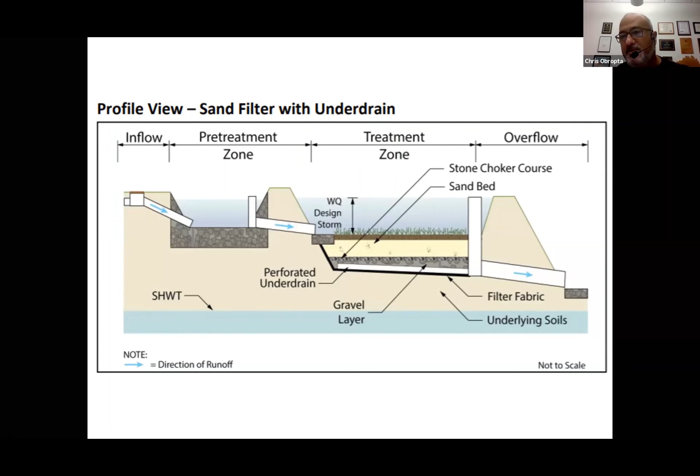So that table says yes and no, because if you have an underdrain, you can't get groundwater recharge. But sometimes you don't need that, because it's all clay anyway and it's not going to recharge, so the underdrain is okay. Here's another cross section of the underdrain.

This is my last slide. As these new regulations come out, these are the 4 systems I think you're going to see most of. Mike was talking about having a minor development component, so you'll probably see cisterns and other things associated with that. But from the major development side of things, you're going to see a lot more pervious pavement systems, bioretention systems or rain gardens, infiltration basins and sand filters. That's going to be used to achieve all these requirements.

I think it's a great process, these green infrastructure practices. I like the fact that they're small. The other real issue towns are going to have, though, is that instead of having one system for development, you may have 10 or 12 of these smaller systems. Now under your MS4 permit you still have to make sure they're all being maintained properly, so you're going to have to do a lot of follow-up. There's going to be a lot of documentation and databases built to track where these systems are so towns can make sure they're being operated properly.

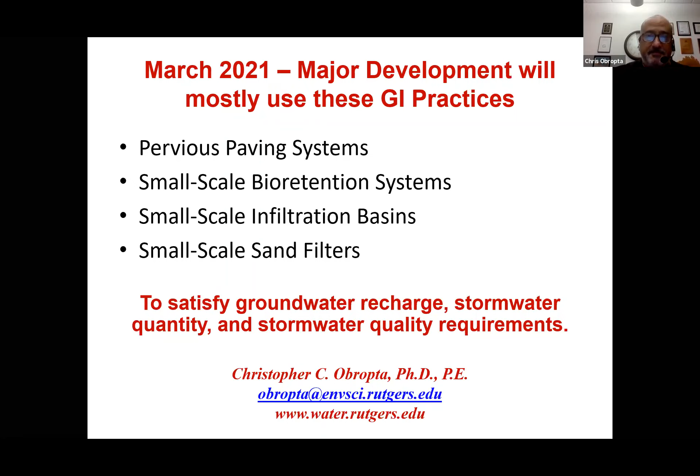Thank you, Tom, Chris. Okay, yep, thanks, that was good. Thank you very much. I feel like I'm a student in your class all the time. So thank you very much.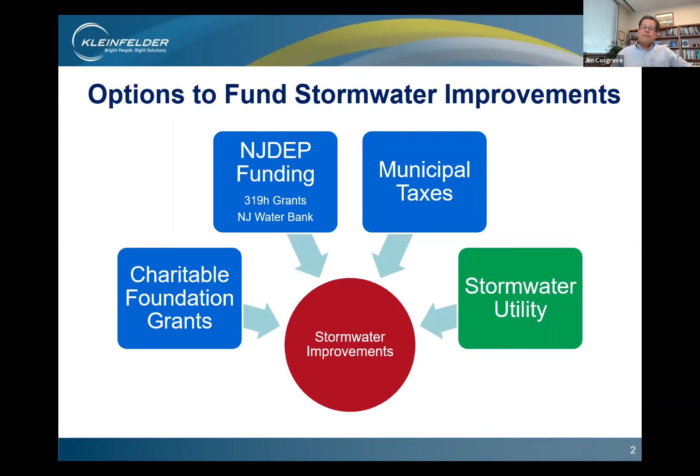We've got something new now that we can use called a stormwater utility. And a stormwater utility is a way to fund the costs of these things. So in March of 2019, the big change was that the Clean Stormwater and Flood Reduction Act was passed by Governor Murphy. This was the first time where a stormwater utility was actually authorized within the state of New Jersey.

So the act authorized municipalities, counties, certain authorities to establish stormwater utilities. And it recognized that problems affecting residents due to inadequate stormwater infrastructure management resulted in health and safety issues, economic well-being, and quality of life issues.

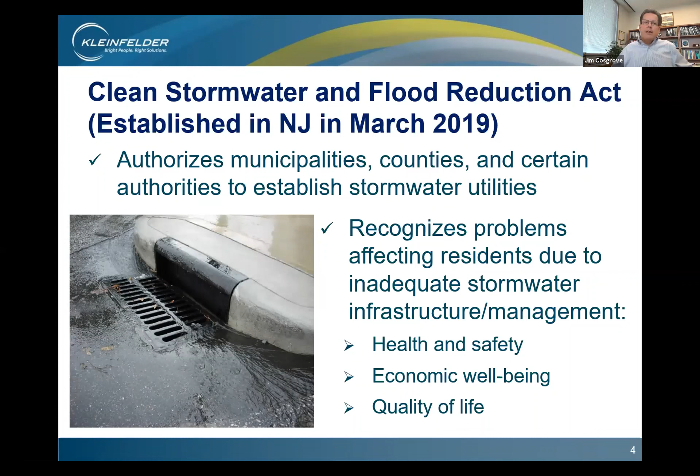So it also recognized that stormwater infrastructure in New Jersey really lacked a dedicated source of funding. I've been involved in a lot of situations where in a particular municipality, there was enough money to repave roads or deal with some pipes underground. And usually the money goes towards things people can see. So the roads get paved and the crumbling infrastructure beneath the surface doesn't get updated.

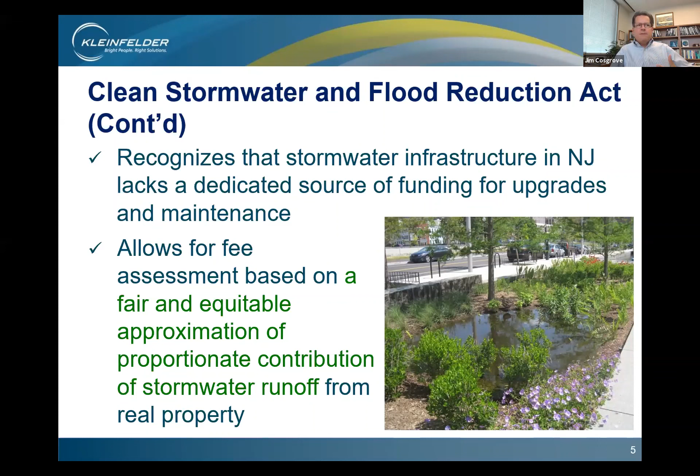So this is a way to provide for that dedicated source of funding. It allows for a fee-based assessment, and this is an important part of it, based on a fair and equitable approximation of the proportionate contribution of stormwater runoff from real property. What that really means is the more stormwater you produce, the more you're supposed to pay as a fee for stormwater management. Now, this is new in New Jersey, but it is certainly not new in the US.

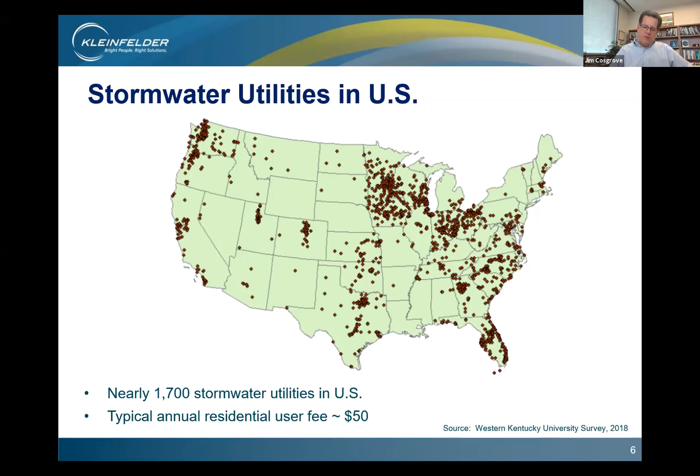There are nearly 1,700 stormwater utilities across the country. And one thing you might find interesting is the annual user fee runs at about $50 a year. And so the cost is not great, but the money that goes into that pot has to be used for stormwater management.

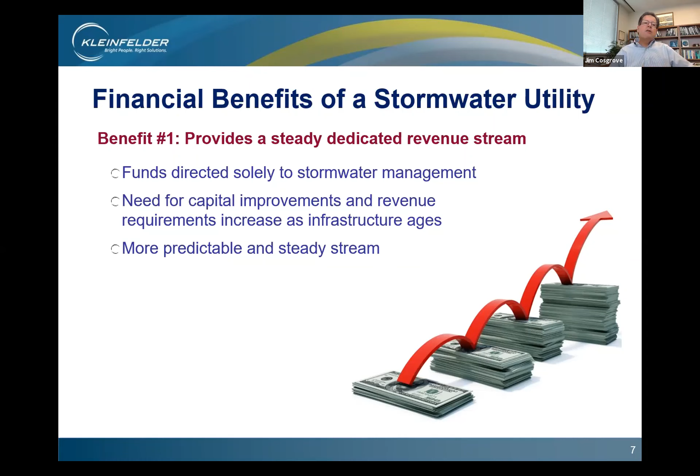So what are the benefits of a stormwater utility? Well, as I mentioned before, it provides that steady, dedicated revenue stream. The funds are directed solely for stormwater management. The need for capital improvements and revenue requirements increase as infrastructure ages, and we often don't have the money to deal with that. So you have a predictable, steady stream of money.

One of the things you often hear about stormwater utilities is, oh, it's just another tax. Well, it's actually a more equitable way to pay for stormwater than a tax, because it apportions the fee based on the amount that's being contributed. One of the things that I always find interesting is that where stormwater utilities have been used, we often see cost savings.

So there was a survey of 40 municipalities not too long ago, and the average residential property owner saved 50 to 70% by paying a fee rather than paying the amount through their property taxes.

The other thing you got to remember is fees can be collected from tax-exempt users. So the example I always use is I live in Princeton. Princeton University owns a very large percentage of the property in the municipality of Princeton, yet they don't pay property taxes. So this is a way for everyone contributing stormwater to a municipal system to pay a fee to manage that stormwater.

The other thing that's different with the stormwater fee is that it provides for credits based on the level of service received. So for example, if a homeowner put in a rain garden like Chris was just describing, they would be able to get a credit off their stormwater fee. So it provides incentives for property owners to reduce impervious surfaces or to manage their stormwater in a more efficient way.

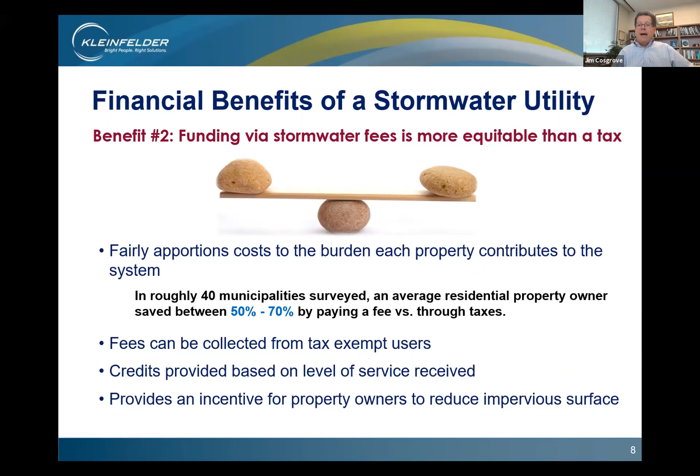So how does the stormwater utility work? First, you have to form the utility. And one thing that most people don't think about is the fact that you don't need to form a new group to form a stormwater utility. In fact, I advise against it if you can. A stormwater utility could be formed through an existing utility. So there might be a regional municipal utility authority, or there might be a county authority, or even a municipal public works department could form a utility. Once the utility is formed, fees are assessed.

And as I mentioned, there's credits provided for impact reduction, and there's credits provided for green BMPs. So we promote the green BMPs that Chris was just talking about. And then finally, we collect the fees, and the funds that are collected end up being reinvested. They could be reinvested through studies, design, and engineering, and any consulting costs that are necessary to design improvements, and then also towards the actual maintaining, repairing, and constructing the stormwater infrastructure.

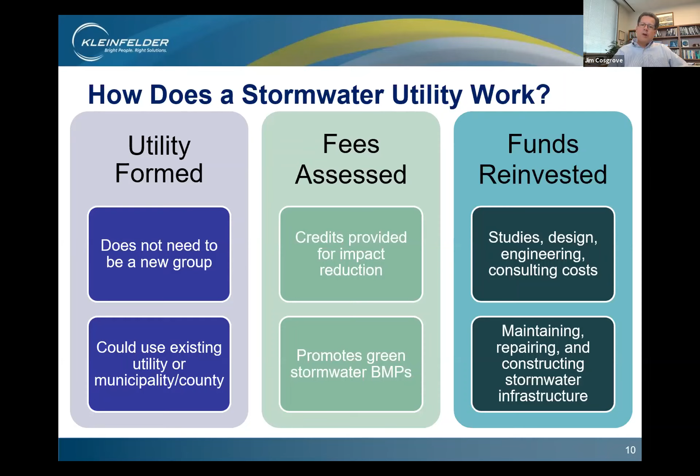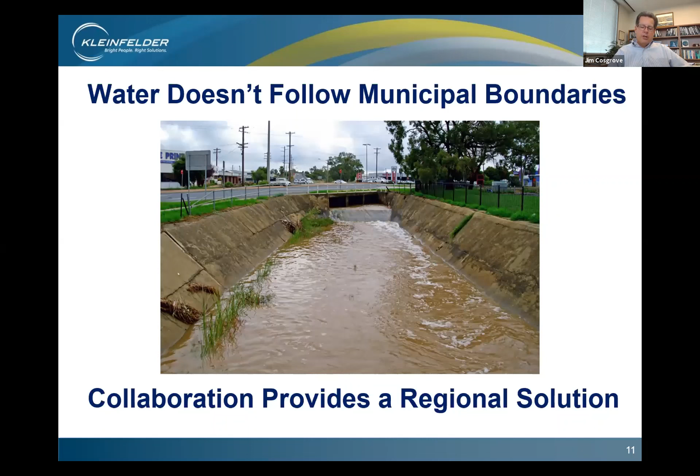So one of the things I just want to leave you with is the fact that water doesn't follow municipal boundaries. So I would highly suggest, if anybody's interested in forming a stormwater utility, think regionally. Collaboration provides for a regional solution. There are a lot of advantages to doing a stormwater utility on a regional level.

You eliminate duplication of efforts. You get economies of scale. You also maximize your opportunities for grants and loans, and it often streamlines regulatory requirements. Keep that in mind - the regional approach usually, almost always, will result in a better, more efficient way of dealing with stormwater. So how do you do that?

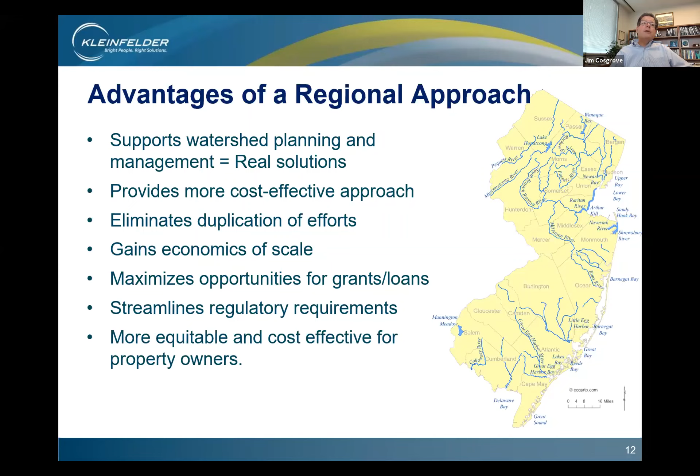One of the things that I've always found is you need leadership. You need a champion who's really going to take this on. And that champion needs to be willing to spend some money often up front to get things started. Now, just a note on that, New Jersey is really encouraging people to do stormwater utilities. And so right now, if you were interested in forming a stormwater utility, you could likely get some money from New Jersey DEP to help with the upfront cost to do that. So keep that in mind.

And ultimately, in order to implement the regional approach, you have to develop a plan that demonstrates real improvements at a reduced cost. That's really the key to the regional approach.